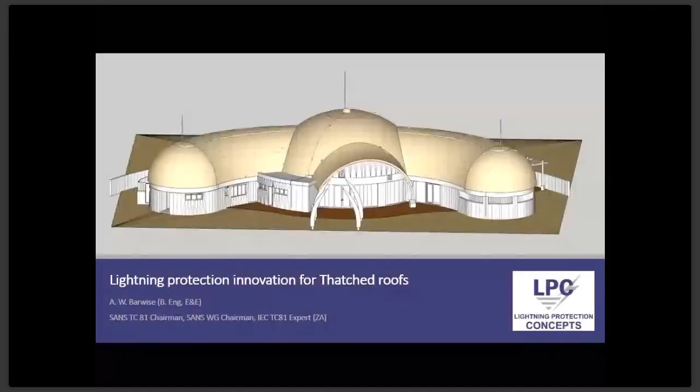I'm going to talk to you primarily about what has happened in thatched roofs. Why are we seeing issues? And then we're going to talk about what's letting us down. We will see what the standards have had to do and why we have a working group rewriting the standards at the moment. Why we have to then look at how to start regulating or in some way share this information, because it's all compounding. We can only be as good as our designs, but our designs are only as good as our installations, right? And so we have this issue at hand. I'll give you some examples of that and then share with you the innovation itself.

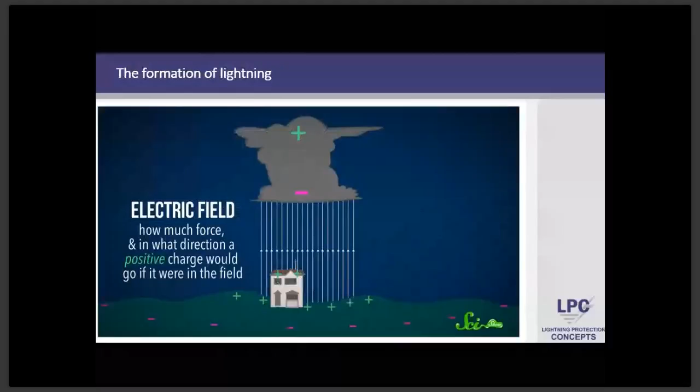A bit of background, just to remind us all that when lightning strikes, it's but a discharge between the clouds, in most cases a negative base, coming down to Earth, and this downward leader, right at the end, before it actually intercepts with the Earth, there's an upward streamer engaging with it, right? It's these two negative and positive attractions that make this attachment of lightning. What we are using today in thatched roofs are these normal freestanding masts.

I think we've all seen them. We've grown up with them. It's just part of who we are. One could maybe even say, as we talk about heritage this week, masts could probably even be put inside that little bundle. But this attachment is made, and then we've got the transfer of energy from the cloud down to the Earth.

Our problem today, as you see in this example, is that it's probably not too clear, but there's a mast on the left, there's a mast on the right, and yet the entire house is destroyed. And so the questions are raised to say, well, what went wrong? So in theory, we all know that the earthing system that is connected underneath this lightning mast, call it some other collector of the protons in this ground.

So we've got all these collectors, and we get all these protons together, and then they rush up onto this conductive element and even rush out further than these conductive elements because they stream towards this negative lightning leader that is coming down. What we have in this case, though, is that it did not work, and we start asking ourselves, but why? What happened?

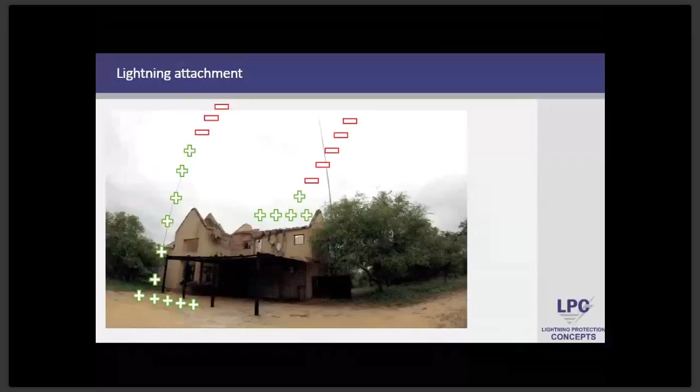So one starts to think, well, if this one should win the race, if this one should be the intercepting point, then what's wrong? Is it the earthing system? Is it the mast itself? How is this industry working? Why is this mast not doing what it should have done? And we start looking at some of the examples.

One of them, when we did a little case study, it was quite interesting to see the South Africans reply to rugby quite strongly, right? So we gave away some tickets for the All Blacks against the Springboks, and we found out through a lot of lodge owners, thatched roof owners, etc., that 45% of the thatched roofs that have conventional lightning protection masts still experience lightning damages. That's a huge figure if you think about it. The mast should be there to mitigate the risk more than 90% at the very least.

Then we see another shocking statistic, and I'll get a little bit into it, is that the increase of lightning is also seen and felt by all. National Geographic is stating that by 2100, the lightning increase globally would be 50%. That's a lot. South Africa is even worse right now, and we'll see that statistic. And then finally, we see that 91% of these homes that have masts never installed any other surge protection bonding requirements.

So we also see that what we as engineers term a lightning protection system to be is in the market perceived as put up a mast. And so we start seeing some of our issues that we need to deal with. All of these are quite recent buildings that I've been involved with, in areas where lightning used to not be high. Let's say areas where an underwriter would say, and even maybe our risk assessments would come to the result to say, we don't really need to mitigate. The risk is not that high.

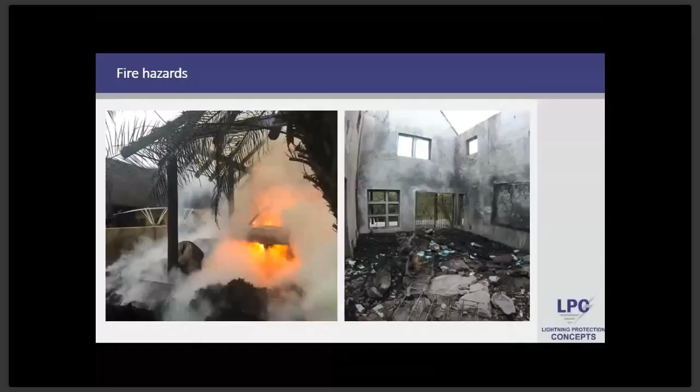And yet, all of a sudden, in these low-lying areas, we see huge lightning damages. We see complete buildings burned down. And it only brings us back to the statement that lightning is increasing. What used to be a low-lying area has now become quite a high area. And I show the example with the CSIR map from 1994. I live in Irene, and in those days it was about 8 strikes per square kilometer per year.

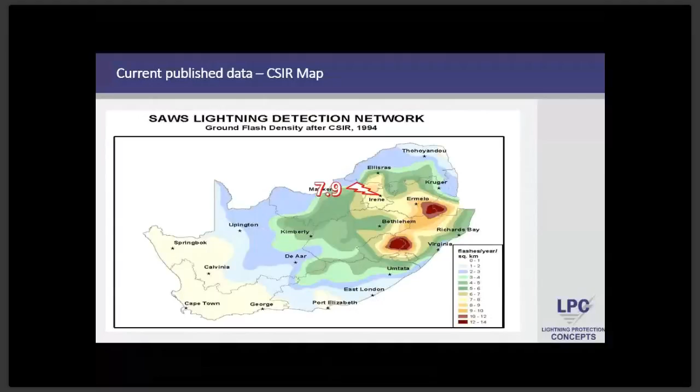And the reason was we had one station measuring the entire country. So one would say the data collection, even the data itself, was not that accurate, or at least it was as accurate as it could be. Then we had some interim data that we released in the SANS 10142 Part 1 update, as well as in the National Building Regulations.

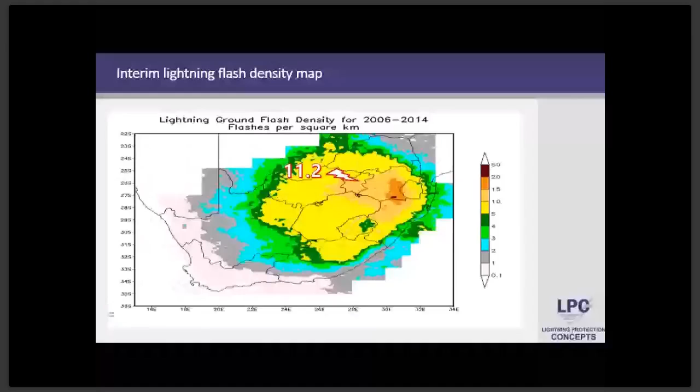And we see all of a sudden, if you just look at the yellow parts, how much that increased, which is called medium to severe lightning areas. Look at that. That's a lot. And then we even take it further and say, but now for 11 years we've got data, and we see that this area has even become 12.1, which is Irene, right?

And all of a sudden with better measurement, now 25 stations, we can even start seeing our little Drakensberg, and we start seeing that lightning is definitely increasing. Look at this Kruger area, exactly where I said those low-lying areas used to be are now actual problems.

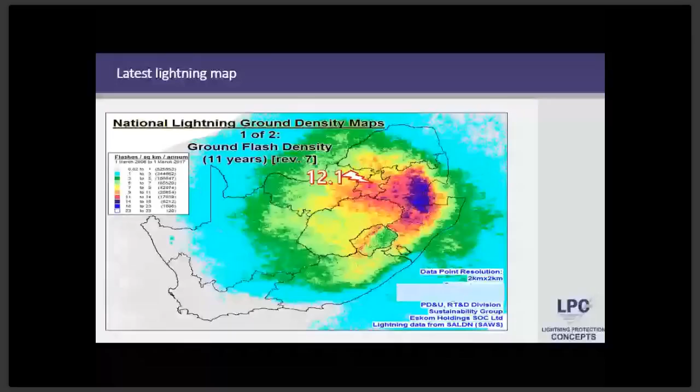So I said that our designs can be as great as we want them to be, but an installer has got to be the one that finalizes it, right? It's got to be the one that seals it. And I give you an example just of what we are facing and why innovation has had to come along, because it's been years of only having a single solution to protect masts.

Here is what is called the lightning COC, which we all know there is no such thing. It's but a test report that is an addendum to the actual certificate of compliance. And this poor installer wrote things that not even a lightning guy understands. A rolling sphere radius of 24 meters. No one understands what that means. An accepted annual frequency of direct strikes to the building of 30. So since when did 30 strikes direct to a building become acceptable?

But it's doing a lot of work with the insurance industry. We see it's like tick boxes for them. The underwriter wants a certificate, the homeowner has to get it, so they just find someone, some guy in some area that calls himself a specialist because he's been doing it for years. And out comes this: I hereby swear, things are going to be okay. But they're not. And we start reading the second page of this certificate, and he says, all material we use are according to the SANS 10313.

Now, for those that aren't familiar with the standard, it's kind of saying I've built the Ford Ranger to the K53 road rules. You cannot test a product in installation practice. It's just crazy. But it seems quite okay, 15 years in the industry, this guy has written SANS on his document, but then he says, we does not take this lightly. And it just gets us thinking, well, if he doesn't even take his COC seriously enough to not have grammar mistakes, what did this guy actually take seriously, right?

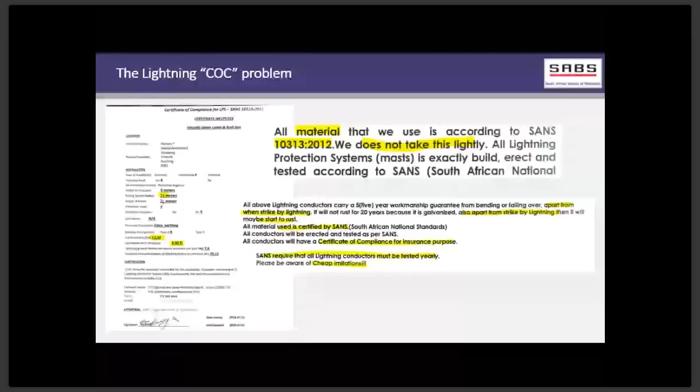And it just poses all these things, that masts are clearly not the way to be used, because of the way this market has developed through non-regulation, through the insurance underwriters just ticking boxes. We've not done what we set out to do. We set out to do risk mitigation, risk management. I laughed at the end when he said, but please be aware of cheap imitations. That was quite funny. But it just shows that we can be as good as we want to, but there's still that element of the installer.

And so, what we've learned and what we've embarked on in a couple of years is that the standards started this problem. Sadly, this is something we have to acknowledge, but gratefully, this is something we as engineers, as a community, can fix. The standards left a lot for intuition. It left a lot for what I think it says. It left a lot for interpretation. It wasn't very clearly spelled out: this is what you do, this is where you start.

And so some of the key updates I just wanted to quickly give you: inside the wiring code, 10142 Part 1, edition 2.1 should be published quite soon. Then in the 10313, we actually have quite a few of the working group members here tonight that are rewriting that standard.

In the 10142 part 1, we show clearly that when an external lightning system is installed, it has to be bonded to the earth terminal of the house itself, or of the building structure. Sadly, please, next time you're at a lodge, walk to the mast and see if there's a connection to the house. Almost never. It's never done.

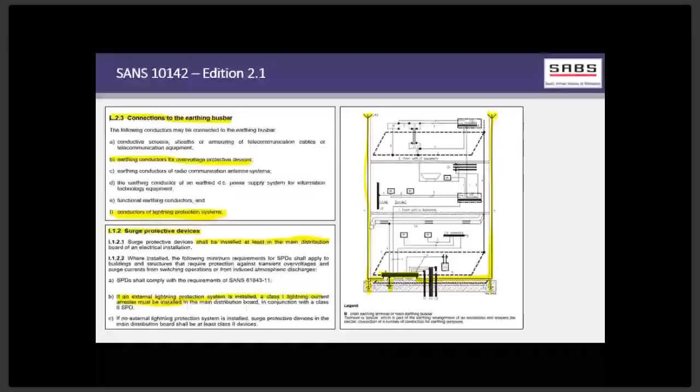We learned from the electricians and the contractors that their 10142 Annex I, which they have to refer to when they mark surge protection yes in the COC, was so complex. It was written by very clever guys. We know them well, we respect them, but it was perhaps just a tad too far for the contractor. And so we had to simplify things for them. And we've done that, and I'm going to show you some of it tonight.

A simplified risk assessment for the contractor to say, if I live in a suburban area for a residential building, I need to know what is the length from the DB board to my kiosk. By knowing that length, I can look at the lightning flash density. Let's assume it's 0 to 5, somewhere like maybe Durban area, maybe a bit higher than Durban. 0 to 5 for a residential building, suburban, incoming line. If that line is longer than 64 meters, a type 2 5kA is deemed necessary.

But in higher flash density areas, such as here where we live in Gauteng, 12, 13 meters is already deemed necessary. Just saying that because more lightning events are happening, my exposure of length of cable can be shorter before it becomes a risk that I need and can address. Making it simple for a contractor to read from and say, now I can mitigate.

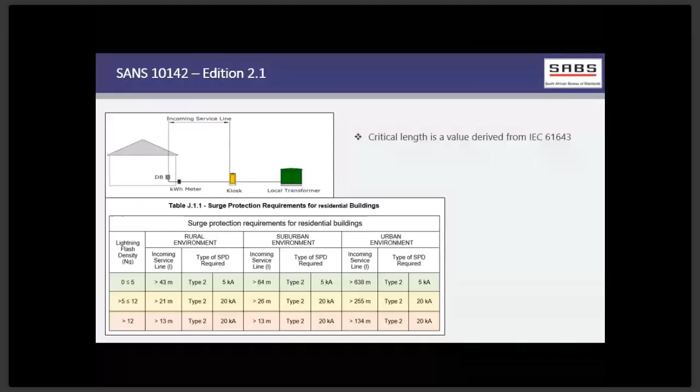What we did in the 10313 is that we had to write the national standard because the 62305 does not address African problems. It doesn't address thatched roofs, solar rooftop, recreational facilities such as golfing places, oppie-koppies, big concerts. We're working hard at safe shelters, and I look forward to hearing what Chandima has to say about it, because he's part of this group that is also writing something to say, how can we make a shanty home safe? How can we do something towards the taxi ranks, for instance? We're updating the latest ground flash data.

And finally, what we needed to do and close the loophole is adopt the new innovations that have now been adopted by both the IEC and the South African national standards. And finally, also, we are mandating the installation safety report to bring back accountability and transparency, because the 'I hereby swear' letter that you do get today doesn't hold up in court. And so we need to bring that back. Here's the actual formal report, and you can see it here.

And we see one of the issues, talking back to why innovation was needed, says very clearly there that the mast design has to be in compliance with another code, 10225. Now I ask you quite easily, have you seen a lighting pole, such as a floodlight? Have you seen it bent or rusted? No. Have you seen a lightning mast bent or rusted? All the time. Yet the manufacturing standards should be the same, so what's wrong? Right? It's not being manufactured to the right standard. And this is why we have this issue and why innovation has had to come.

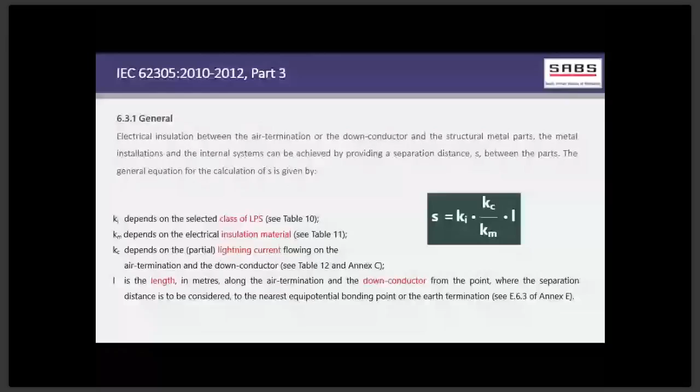So here's the background. My predecessors in the SANS 10313 wrote a very clear statement stating that a mast shall be at least 1 meter away from the thatch or any other object, because they did not yet have a separation distance calculation — it was not adopted yet. So they made a very good, very strong statement, and it was used, and we said clearance distance has to be at least 1 meter.

When we do the same calculation today, from here to the 3 meter mark, it's about 12 centimeters. If we do it to the top of quite a tall thatched roof, it's 10 meters — it only shows us that we only need about 0.4 meters.

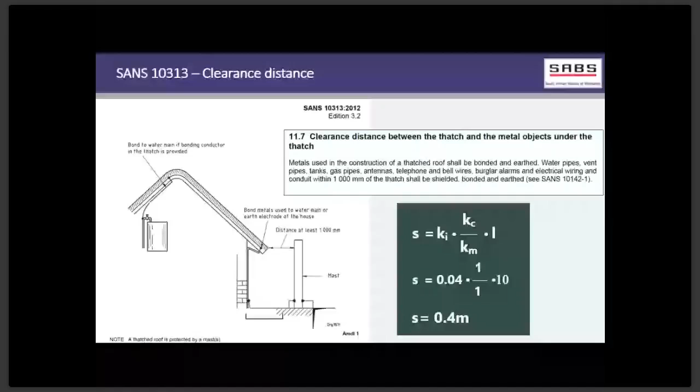So now knowing that we've got actually a lesser separation distance, we start thinking of other methods. This is where the cable system called HVI, high voltage resistant insulation cables, was adopted in part 8, as you can see, one of the component standards, and it is a testing standard to say what these insulated conductors have to comply to.

You'll see that you have various thicknesses, because we might have various separation distance requirements, all the way from 0 to could even be 1 meter. One can see lighter units which can give you 40 centimeter separation distance, longer ones which give about 75, and even for explosive zone areas, up to 90 centimeters in a single conductor. If one needs more, or needs to extend this cable, you would have to have multiples in order to share the current. I think that's quite simple.

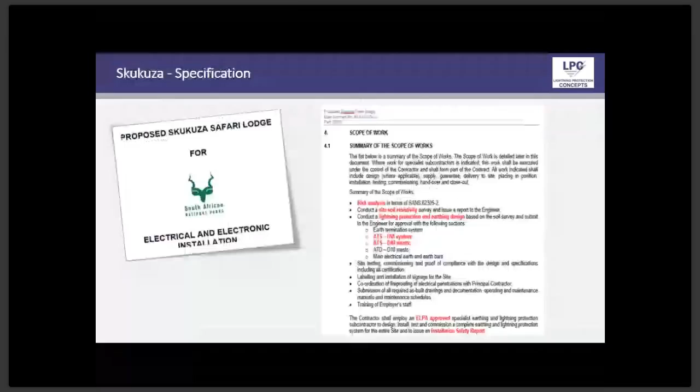I'll show you a video quite quickly — just, it's, I should start it again. Ready? It's a video just to showcase the process and what has happened, and it explains the technology quite well.

Thatch buildings located in high lightning flash zones have always required protection from lightning. The risk of fire as a result of a direct lightning strike and the consequent total destruction of the thatch structure is simply too high. Traditionally, conventional lightning protection methods like the use of freestanding masts have been employed to protect these potentially highly flammable structures.

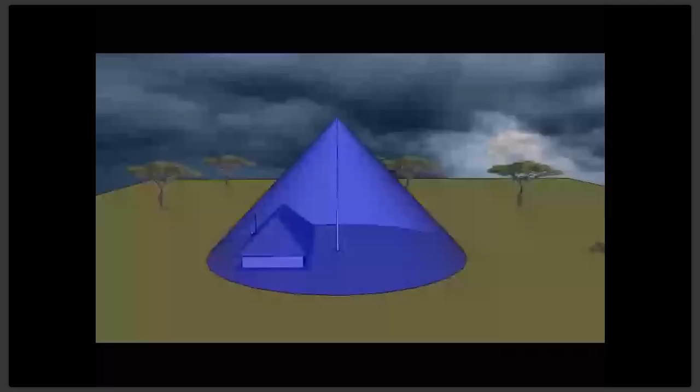Freestanding mast protection methods are undoubtedly unsightly and often severely detract from the building's aesthetics. Freestanding masts are installed away from the thatch, and therefore they need to be very tall in order to provide protection over thatch structures. Recent research has also shown that these conventional methods have also proven to present other lightning-associated problems, with nearly half of all thatch owners reporting damage to electrical equipment inside the structure.

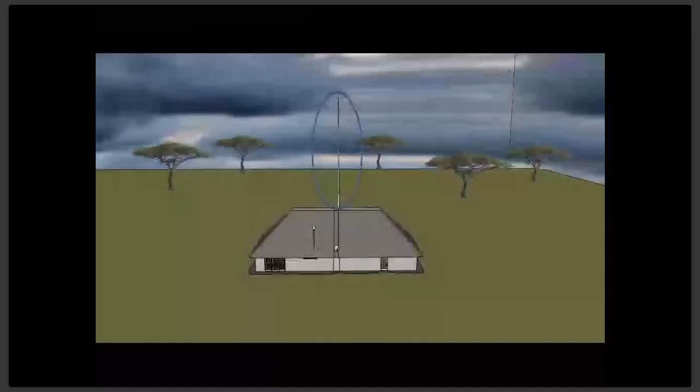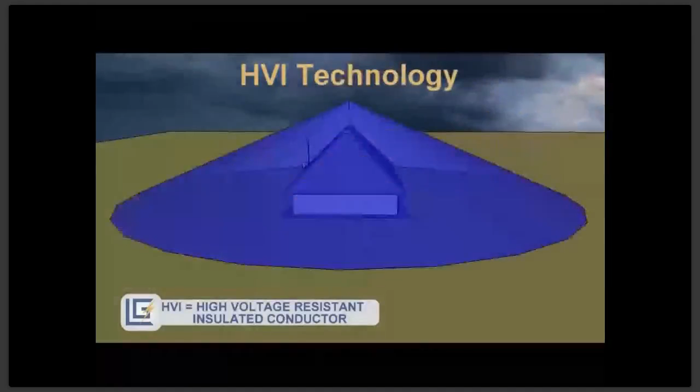It is now possible, with the use of HVI technology, for lightning masts to be installed directly onto thatch structures. The use of much smaller HVI masts placed directly onto the thatch structure offers the same zones of protection as a conventional freestanding mast.

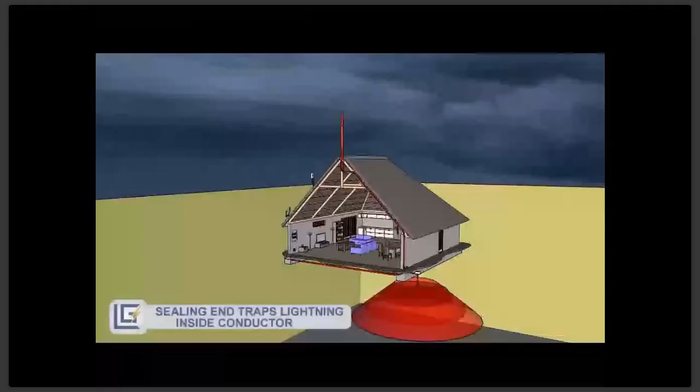In the event of a direct lightning strike, the HVI technology makes use of what is called the sealing end. This is the mechanism that traps the lightning current inside the conductor. The visual advantages of using HVI masts are clearly visible when compared to older technologies.

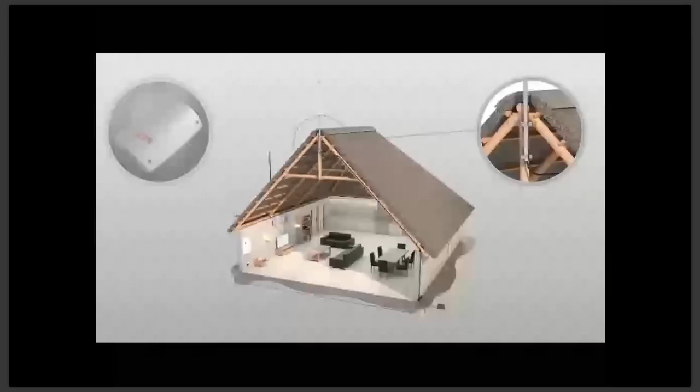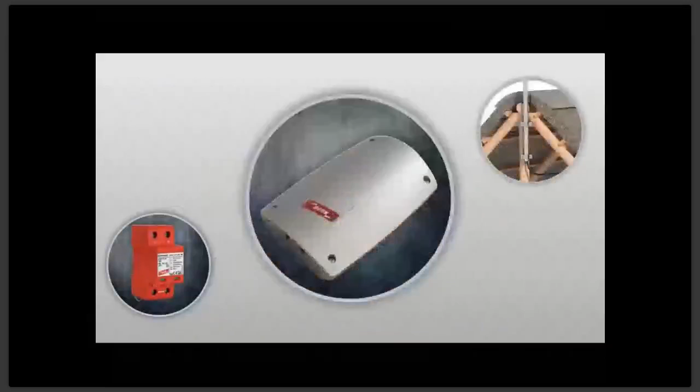HVI lightning protection systems have a proven track record of over 15 years. It is the combination of HVI protection systems and the installation of the proper surge protection devices that provides unsurpassed protection from lightning.

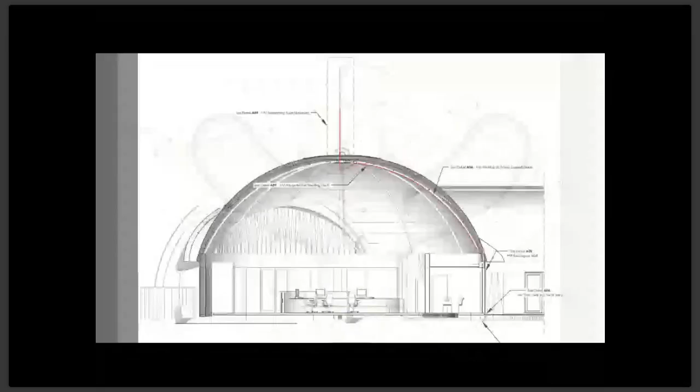Our network of master installers are highly trained and experienced in the installation of these state-of-the-art lightning protection systems. Properly designed and installed HVI protection systems comply with the relevant SANS standards, offer better protection from lightning, are easier to maintain, and most importantly, are far more aesthetically pleasing.

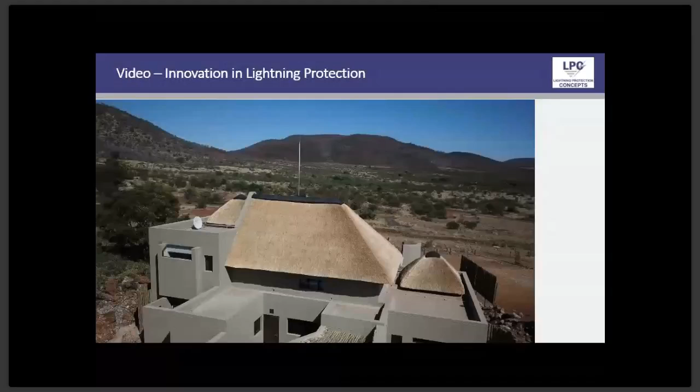Just one question, Alexis. Hi, it's Steve.

You mentioned the new certificate of compliance. How's that going to work? Is it going to work like the existing certificate of compliance with the wiring spec, where the contractor would complete that? You said training would be provided by the manufacturer, but I want to know from a regulatory point of view, because that seems like a gaping hole, an elephant in the room. The existing regulations, where they don't work, it's not the regulation itself, it's the way it's enforced and applied that seems to be the problem.

So that's a pretty loaded question. I'll start and dismantle it a little bit. Right now, the only certificate of compliance we have is the electrical one, which means only a registered person with the Department of Labor is allowed to sign it. Lightning protection forms part of the fixed electrical installation, so he is the one that takes responsibility right now. Electric fences, gas applications, and lightning protection are but a test report attesting to what he has certified.

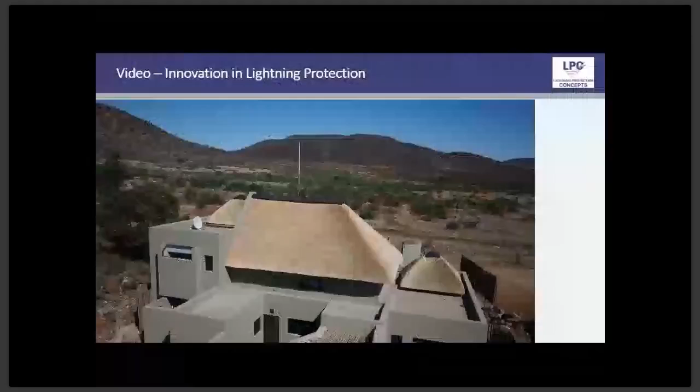No, thanks for the insightful presentation. Just a clarity-seeking question. Towards the last slides, where you indicated the mast, or the one attached on the rooftop, as compared to the one at a distance - my understanding, all I want to find out from you, has any comparative study shown that the innovative way of doing things works much better than the other one, and is it incorporated into the standard now?

Well, no. Because the technology is still quite new, I don't think we have enough data to make such a statement. But remember, we use a method - the rolling sphere method, protection angle method - to place these rods. So the efficiency in interception doesn't change; we still apply the same rules, so that wouldn't make it more effective. The only part I believe personally is more effective is that it has been tested and proven. Where the mast is, I think there's nothing that shows it's been in a lab, taken a 100,000 amp strike and survived, or did not allow a flash across. So that's the only part where I'd say personally it is a more reliable system, because it has been tested and passed these tests.

Thank you, Alexis. The question I have is about the HVI systems being used currently - are they manufactured locally? Are they tested locally? And apart from the design tests that one will do to prove the current rating of the system, whether it's a 30 kiloamp or 100 kiloamp type system, are there routine tests done to ensure the manufacturing quality of that system?

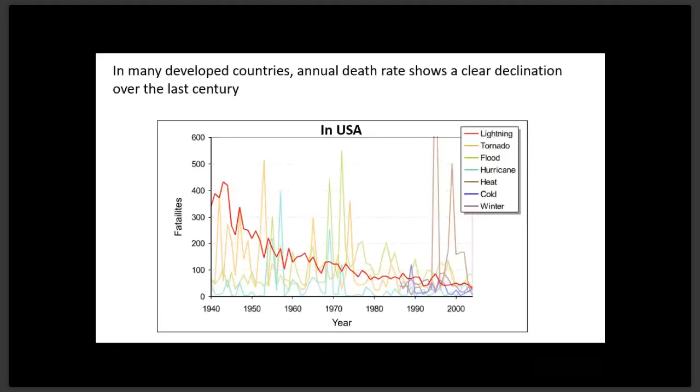However, when we look at the countries with low literacy level, less development, then we see that the trend is the opposite. And maybe you have some idea that in many countries in Africa, during the last few decades, where some sort of scientific lightning research has been started, we have seen a clear increment of lightning fatalities.

This may be due to a few reasons. It may be due to the increment of lightning ground flash density, but I'm not very sure about it. But on the other hand, people say that it is due to the sudden burst of population, especially the population burst together with poverty, which exposes more people to lightning.

Personally, I believe that one of the major reasons we are apparently seeing an increase in lightning hazards or lightning fatalities is the high level of communication development in many countries. Because a few decades ago, if somebody in a village was struck by lightning and got killed, that may be news only for that village. But today, within one day, it goes to the other end of the world.

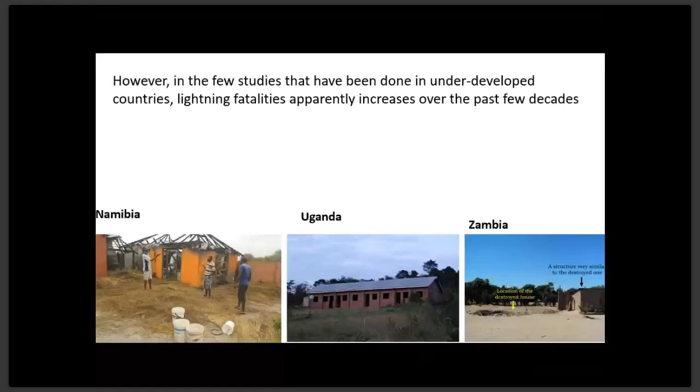Okay, now in the USA, there's a very popular slogan which says, when thunder roars, go indoors.

But there was a time that we tried to introduce this into South Asia and Africa as well. Then suddenly we got to know a shocking statistic. That is, in Bangladesh, in India, in Nepal, then when we crossed the Indian Ocean and came to Africa, we found that in Zambia, in Uganda, in Malawi, in many of these countries, 60 to 70% of lightning fatalities have happened while the victims are indoors.

Now imagine what a dangerous slogan this is for this part of the world. When thunder roars, go indoors and kill yourself. And the simple reason, as we see, is that indoors is most often a sturdy building in many developed countries. When we say go indoors, they go into a sturdy building. But on the other hand, in many parts of the world where poverty is dominating, this is a sturdy building, which is simply a temporary hut for a person in a developed country.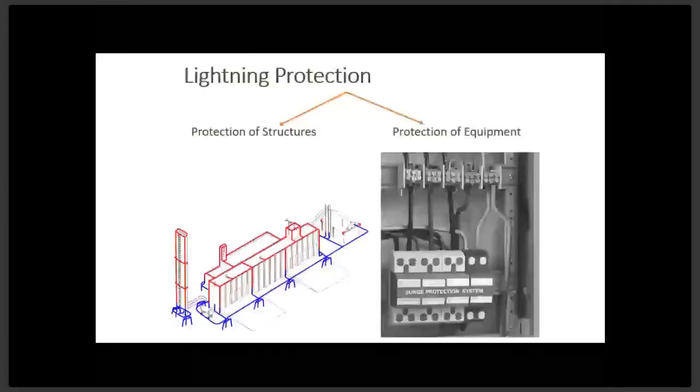And I'm not going into the details of this. An ordinary lightning protection system usually has the air termination, down conductor, and earthing system, which we call the external protection. Then, as Alexis said, internally we have to make sure that there is no arcing. So either we bond the LP system electrically to metal parts, or we keep a certain safety separation. And then these are the standards. We have to do a risk assessment and then go for the design.

Now, when we analyzed what are the issues that prevent people from adopting these standard recommended lightning safety or lightning protection measures, these are what we came out with. For underprivileged communities, the LP system is more expensive than the house itself. Design criteria are too complex. Distance between the working environment and a lightning safe structure is too much.

Lack of awareness. Then issues with the industrial sector: again, non-permanent status of structures. If you take a construction site, many of the places where the workers stay overnight are temporary structures. You can't give a comprehensive lightning protection system to that. Then space restrictions, they don't have place to come out with lightning protection systems.

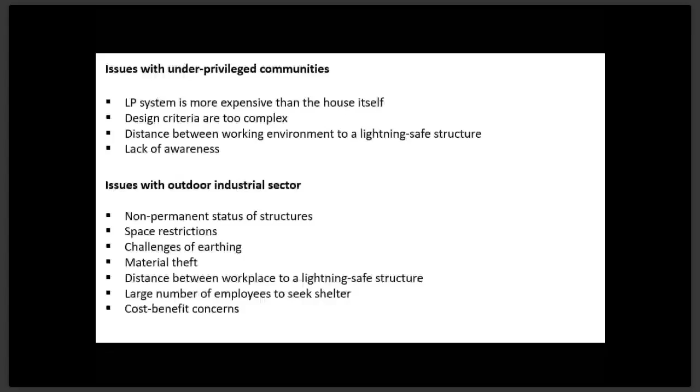Challenges of earthing, material theft, distance to the workplace again comes, large number of employees to seek shelter, cost benefit concerns. So these are the major issues. And then we started developing these low cost structures. Then we found that we have to define where we stand and what we call a safety structure.

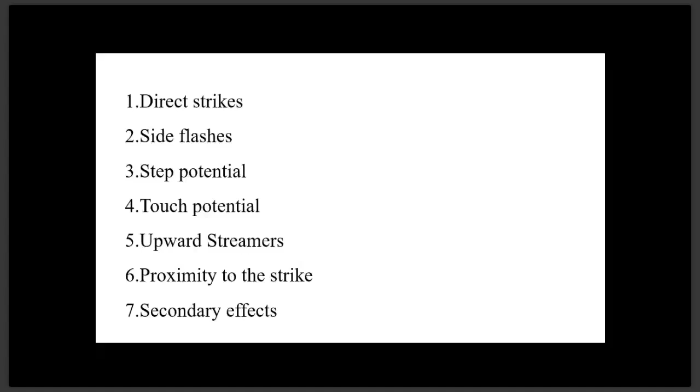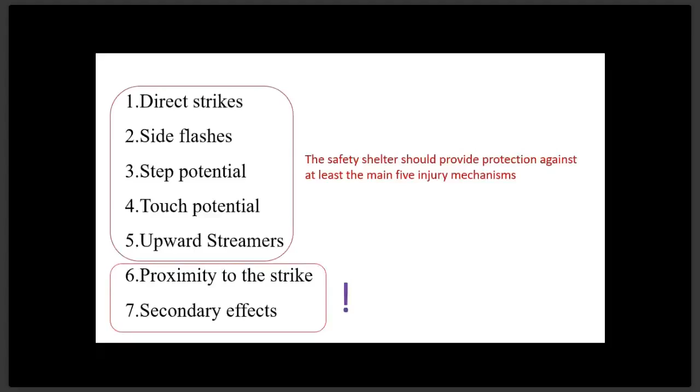These are the well-known lightning damage mechanisms or lightning injury mechanisms as we have identified. And we thought that at least the first 5 of these should be covered in our safety shelters. Whatever the safety measures, whether low cost or high cost, we have to protect the people from these 5. And then what about this? Proximity to the strike and secondary effects.

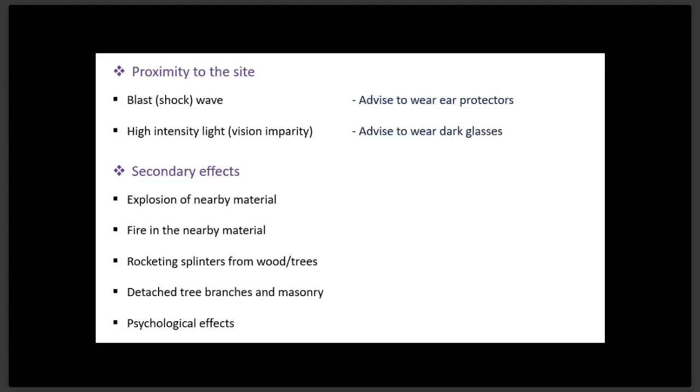For the proximity, there are 2 issues, the shock wave and the high intensity which causes vision impairment. We thought of advising the people who use these structures regarding that. Then for the secondary effects, again advise: whenever you are having a safety structure, be a little bit concerned about the environment. If there is a tree nearby, be careful, because if lightning strikes the tree, there can be fire or splinters coming towards you. Psychological effects we could not sort out yet.

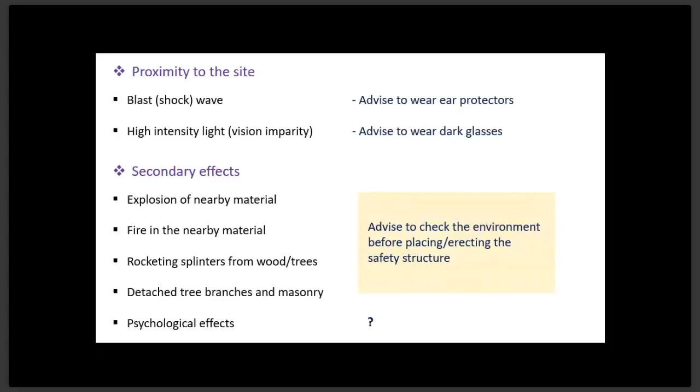And then we came up with one design like this. Now you see, if you go for the single pole type structures, which Alexis showed very clearly in his presentation, the cost is really high. You have to go to a very large extent. And then he gave a solution. That's why I said high-tech solution. Wonderful. We all accept that. But then comes the problem of cost.

Our focus targets are underprivileged people, or even the industrial sector, but they don't want to spend a lot of money on a temporary structure. And with the pipe, the 2 air terminations connected with a catenary wire have the advantage of a much smaller height.

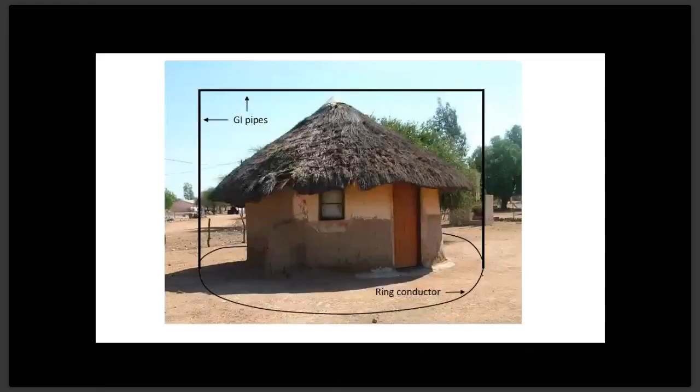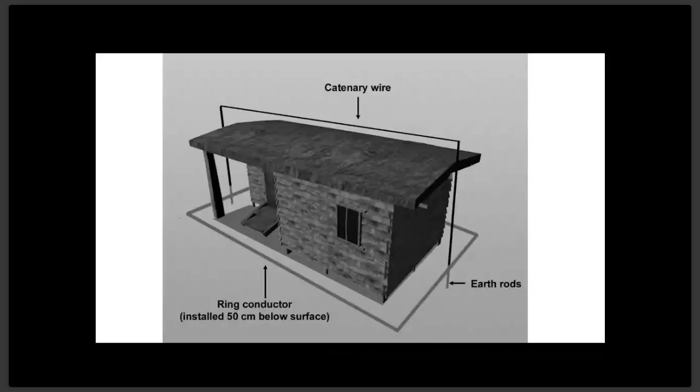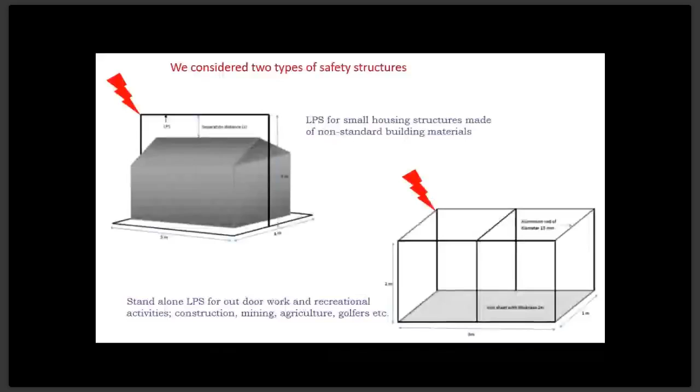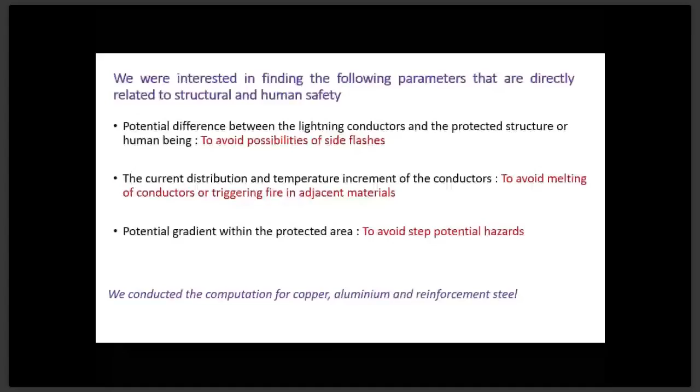We wanted to see, whenever lightning strikes the safety structure, what would be the potential difference, the current distribution, and the potential distribution in the area. We conducted the computation for copper, aluminium, and reinforcement steel. This is just a little bit about our computational parameters. And then we used ANSYS and COMSOL.

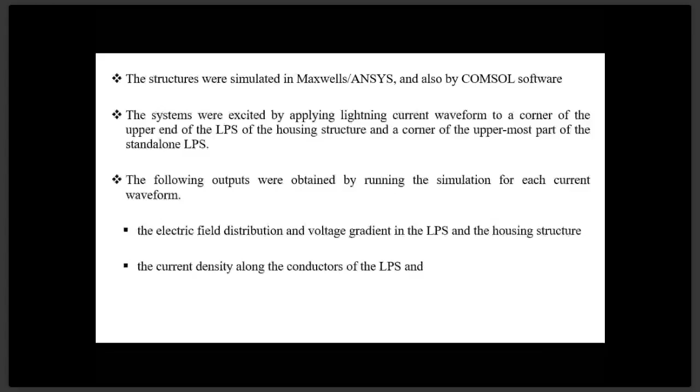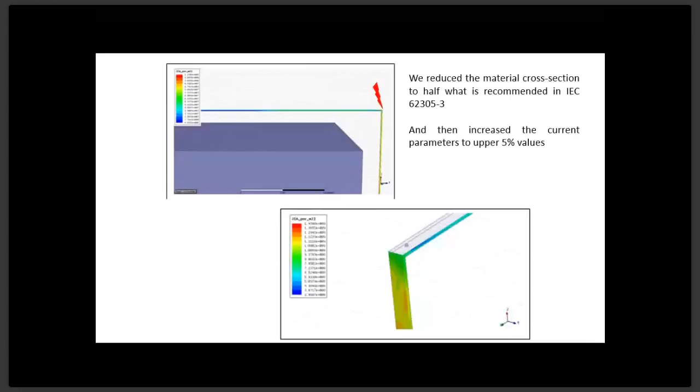And then we applied the 50% current parameters, and we found the electric field distribution and voltage gradient in the LPS and the housing structure and the current density along the conductors. First we applied the median value of lightning currents, and then we went to the highest 5% of the values. We applied negative subsequent stroke, positive stroke, and negative first stroke.

And then we found that the maximum potential difference resulted between the corners of the top ridge of the structure and the adjacent corner of the LPS. And this value does not exceed 150 kV. Don't forget that I'm talking about impulse. So this is the peak impulse voltage value.

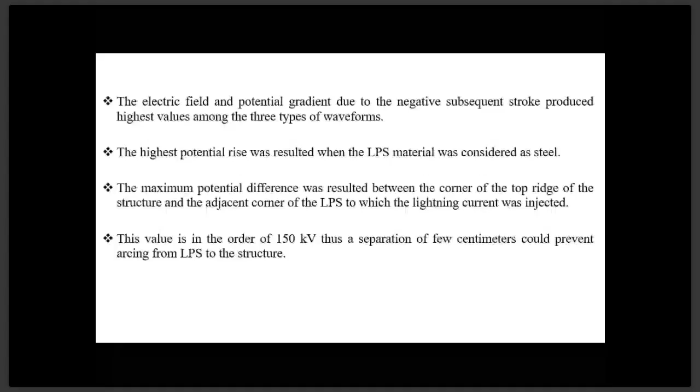Then potential distribution within the ring conductor remains at levels below any harmful step voltage, even for the highest 5% lightning current peak values. The maximum value is around 0.2 kV across a 50 centimeter gap. We usually consider the step potential between the feet of a person over 50 to 60 centimeters. However, it is advisable to have a layer of insulation material on the ground, both inside and outside the structure. This is what we recommended.

Although we do not consider the safety of people outside, it is important to discuss that. I will go into that later. As the potential gradient outside the protected area could be much higher, you should advise people not to be outside. Now, did you notice that when I was demonstrating this design, I did not use the word earthing or grounding even a single time?

So with the ring conductor there is some sort of earthing, but we are not emphasizing even measuring the earth resistance. The simple reason is we are concerned only about the safety of the people inside, not the people outside. We can go for a comprehensive earthing system, but that will increase the cost very much.

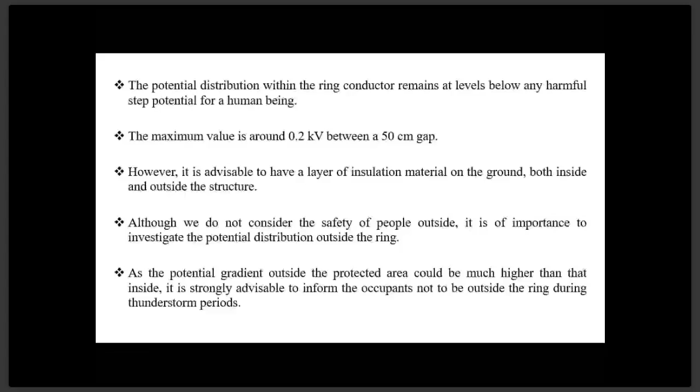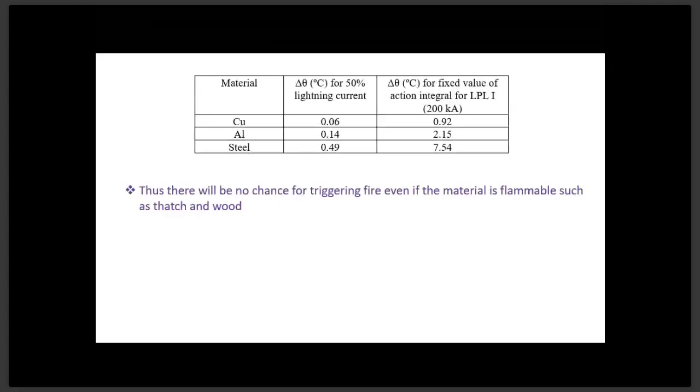Then we calculated the temperature rise and found that even for 200 kiloamperes, that is the lightning protection level 1 current waveform, 10 by 350, the temperature rise is only about this. Therefore, there will be no chance of triggering fire even if the material is flammable, such as thatch.

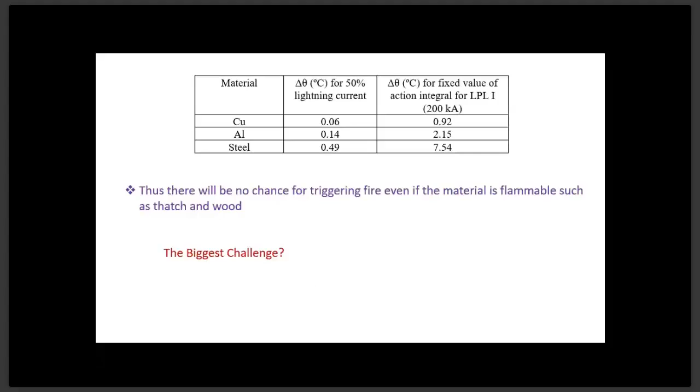So we have now proven by simulation that this arrangement can avoid side flashing, touch potential, step potential inside, and direct strikes. But there is a big challenge still left. If anybody can propose a solution for this, that will be worth a million for us. This is something that we are trying to sort out.

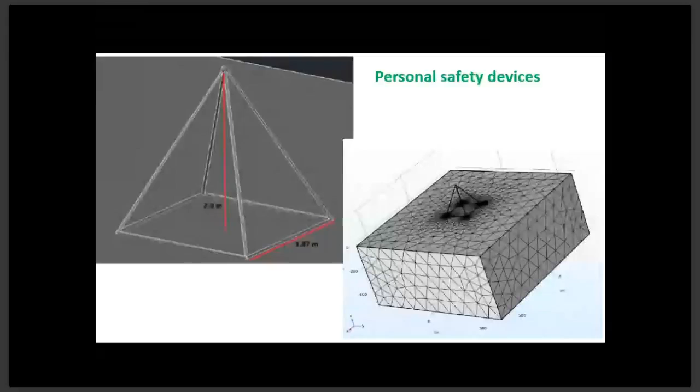Then I'm coming to the next type of structures we have developed for the entertainment industry, sports industry like golf courses, and even amusement parks and many other places. A very simple pyramidal structure, just like a tripod. We went into further experiments on this. After doing the simulations, we even experimentally tested them. This is the WITS University HV lab.

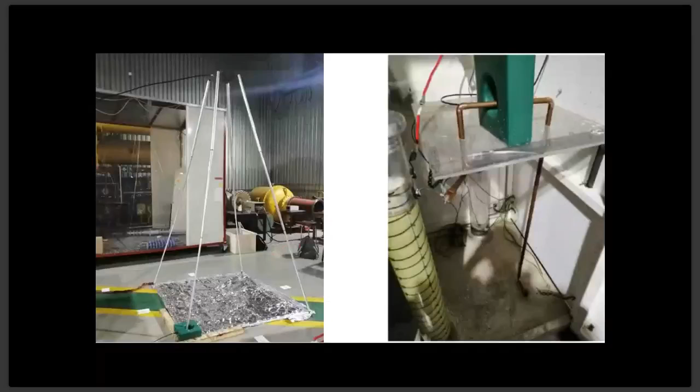So we developed the structure and tested it with and without an aluminium foil inside. I will show you the results. Then we measured the current waveforms. We applied 10 by 350. Although you can't see it here, the final product will have a 3 millimeter thick PVC cover. It would be wonderful if we could go for the material proposed by Alexis, but it would be very, very costly.

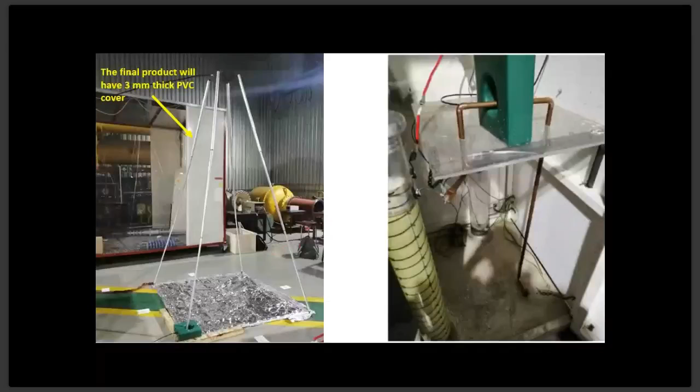Let me show you something very interesting. If lightning strikes this structure, say I apply a 10 by 350, 100 kiloampere current, and you look at this point, 0.6 meters away from the structure, and this point, 0.6 meters inside the structure, you will find something a little scary. This is the voltage waveform at the yellow dot, and this is at the red dot.

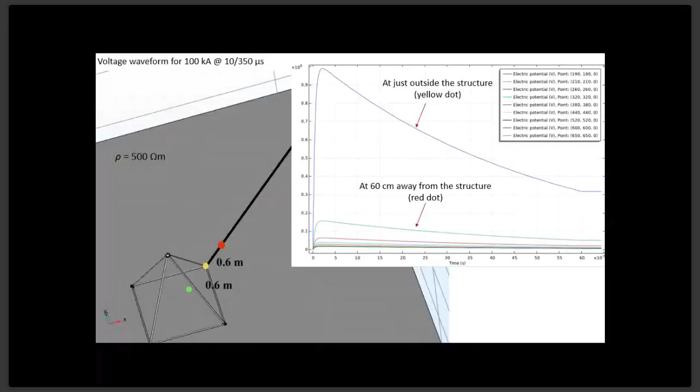The difference from here to here is 830 kV. So if somebody is outside and one foot is touching the structure, or he is holding it, he will be subjected to almost 1 megavolt. But on the other hand, inside, without aluminium foil, it is just 210 volts.

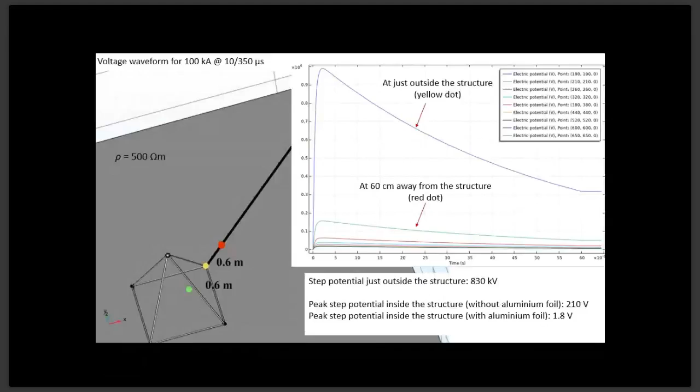Don't forget that this is impulse, not AC or DC. And with aluminium foil, it is just 1.8 volts. So inside, the person is fully protected. However, we have to ask him to stay away from the metal poles if they are bare. That is where we thought of the PVC cover. Maybe with this technology, we'll improve it further.

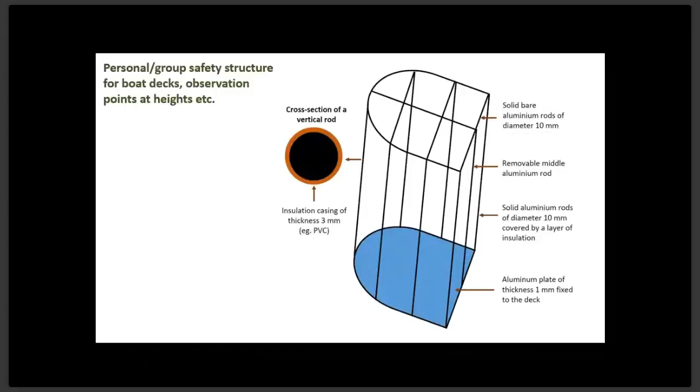And this is a structure we have developed especially for boat decks. It was designed at the request of Nat Geo, the National Geographic Channel. They wanted to do some filming in the DRC, so I developed it for them. This is what we have developed for boating structures. As time is running fast, I'm not going into the details. All the dimensions we have checked by simulations.

Now, for all these structures, before going for a business model, they are already tested by simulation, and now we are in the process of testing them with laboratory high current impulses. We have a big plan of a triggered lightning camp in Pretoria, most probably in 2020. We are having discussions with CSIR, University of Pretoria, and most probably we will get somebody from the Florida group, Marcos Rubinstein, who is now in Switzerland. Hopefully we will have a camp next year.

If it goes as we planned, I invite all of you, anybody who is interested in testing your equipment, we will give you the facility. It is for South Africa, so it is open for you all.

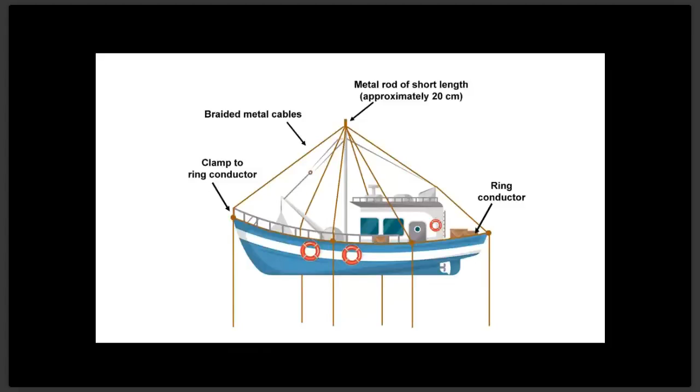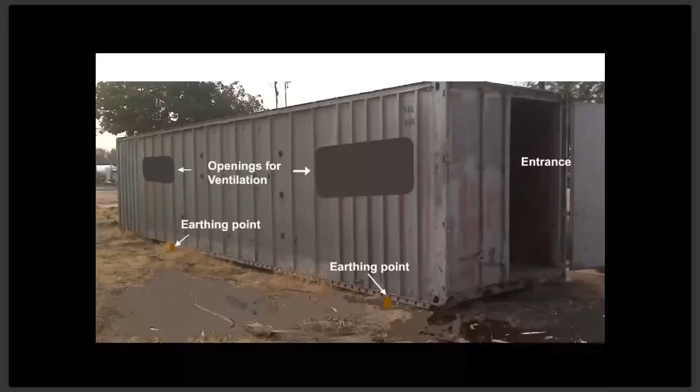This is another boating structure. And for mass community, a large number of people, we find the best lightning protection device is an abandoned, discarded container. You can modify it, and you cannot find something better than this for lightning protection.